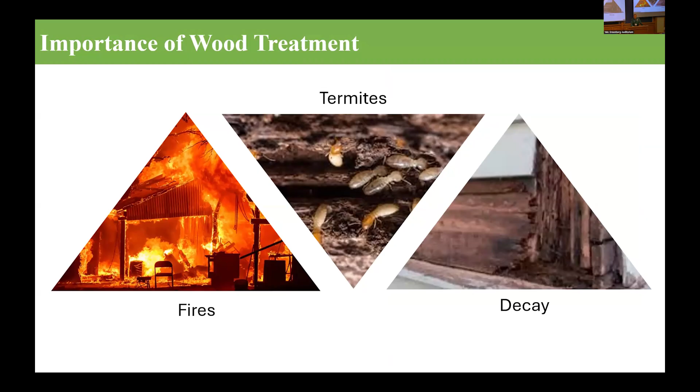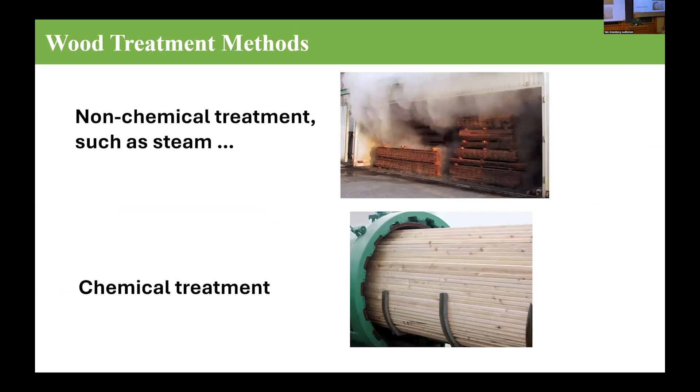Talking about wood treatment, we have fire retardant treatment, termite treatment, and decay resistant treatment, and this has become a very important issue, especially last year, when the California fire brought attention to it. If all the wood building materials had been treated, the damage would be reduced significantly. Treatment can be done in two different ways. One is non-chemical treatment, like steam, which tries to improve dimensional stability, etc. The other is chemical treatment, which we will emphasize here.

Chemical treatment with wood preservatives, the traditional treatment: alkaline, ACQ, borate, and the fire retardant treatment. Dr. Zhu mentioned quite a few chemicals used for treatment, mainly borate, borax, boric acid, ammonium sulfate and zinc borate. Next is the chemical treatment that is mainly delignification. The wood treatment industry is about a $6 billion industry. It's a huge market out there.

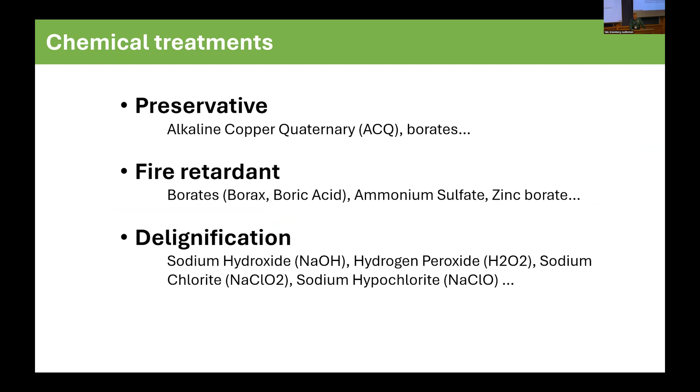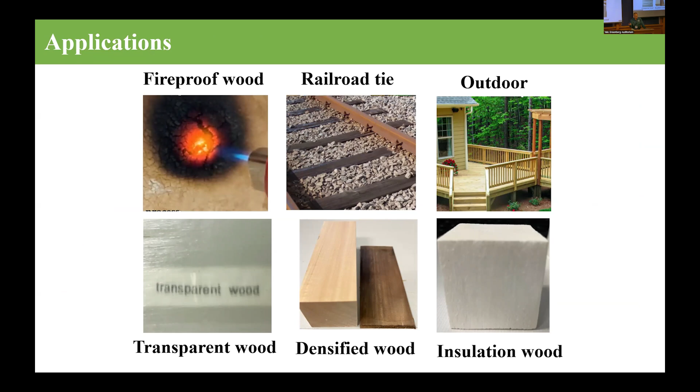I'll talk a bit more on the delignification process, because this self-flow treatment process works really well for delignification. I'll show you some of the data, and these are the chemicals typically used for delignification. There are a lot of applications for wood treatment, like fireproofing, railroad ties and outdoor wood products, which all require treatment. Transparent wood, densified wood, insulation wood have had a lot of technology developed, especially in Bing's lab, and those all require delignification.

Traditional treatment mainly relies on pressure and vacuum. There are also some simple treatment processes like immersion, and there's also sap displacement and the Boucherie process. One has pressure, one doesn't. Those are the traditional treatments. In this slide, we compare different treatment techniques and see the pros and cons of each.

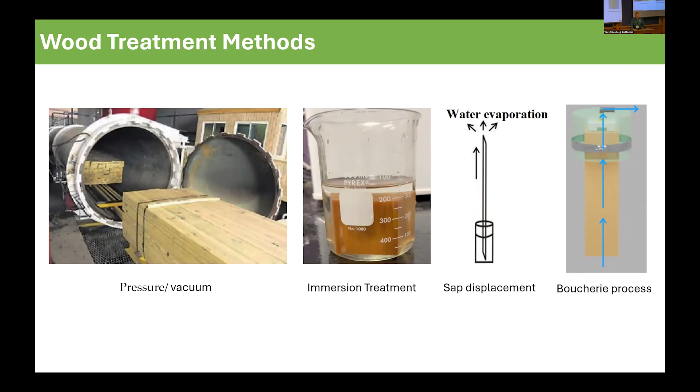The limitations of these treatments: we categorized them into two, one with pressure and one without. Without pressure, the treatment is pretty mild, but penetration is not uniform and the process is slow. With pressure, there's potential damage to the wood integrity and low efficiency. The uniformity of the treatment is the key. You can see here some damages in these pictures if you introduce pressure into the treatment.

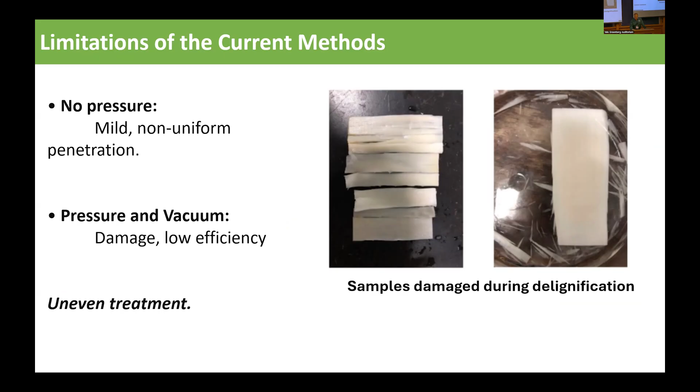Now, self-flow. This is what we're doing in this technology. It's inspired by tree growth. In a tree, photosynthesis on top draws the water from the soil up, through capillary rise and pressure differences. Following this mechanism, because wood is a porous structure, we just need to do something on the top to simulate the photosynthesis process and draw the liquid from the bottom up. Then we place the lumbers vertically in the tank.

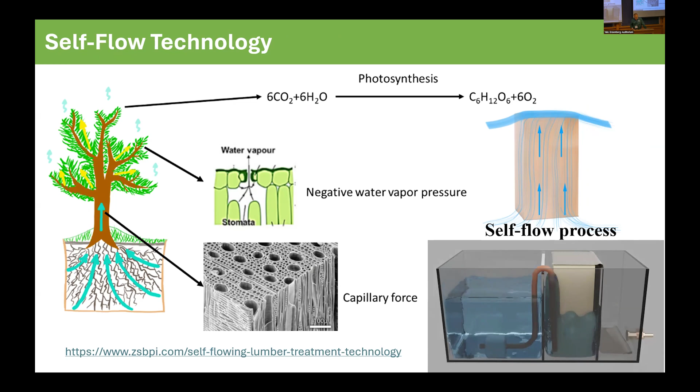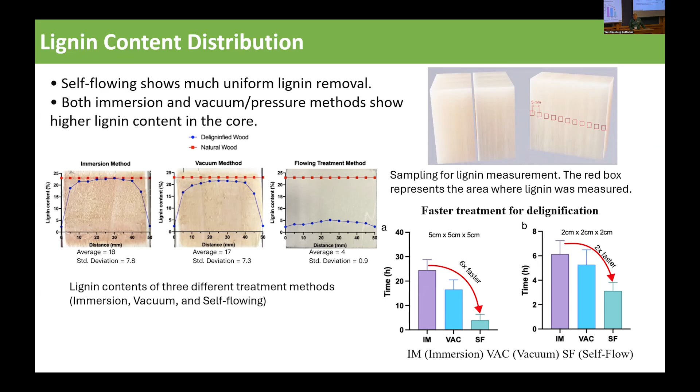And if you look at the delignification speed, it is related to the size of the samples. This is the self-flow process, this is the immersion process, and this is the vacuum. For the 2 by 2 by 2, our process's reduction is 2 times faster. But for the bigger sample, 5 by 5 by 5, these are all small, but imagine for commercialization it's a bigger specimen. The reduction rate is even higher, 6 times quicker, compared to the traditional process.

If you look at this SEM, A, B, C is the delignified wood from the self-flow treatment, and D, E, F is the immersion process. This is self-flow, this is immersion, and this is vacuum. After the self-flow treatment, there are a lot of voids opened; you can see very clearly here. But for the immersion process, there's still a lot of lignin in it, so the efficiency is a lot lower.

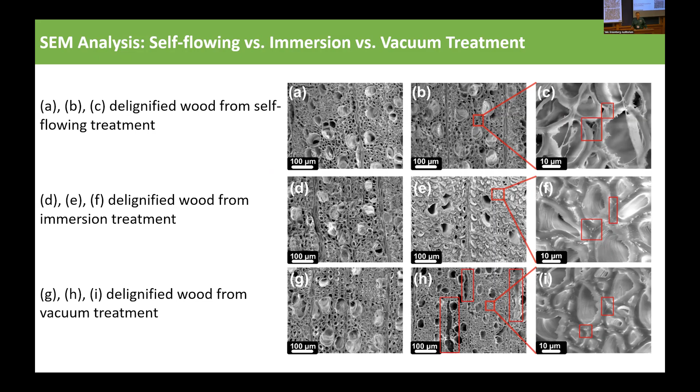And for the vacuum treatment, in addition to some of the cells still having lignin in them, you can see some cracks over here, because when you apply the vacuum and pressure, that hurts the structural integrity of the wood. So that is one of the drawbacks of the pressure treatment process.

And this is the performance of delignification for different species. We know the treatability and permeability of different species are all different, and the same happens with self-flow. For species like basswood, balsa wood, and poplar, it's very effective. We compare: this is self-flow, the second one is vacuum, this is sap displacement treatment, this one is the simple immersion process, and this is the Boucherie process. The Boucherie process is similar to self-flow, but with pressure.

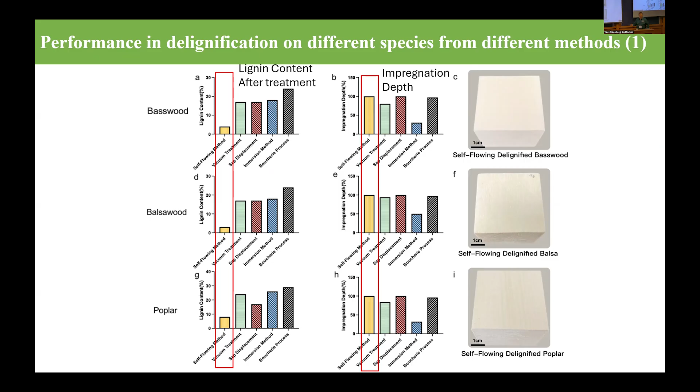And we can see the self-flow process has significantly lower lignin content. After the treatment, we measure the lignin content to check the treatment efficiency. From the different methods, the self-flow method has significantly lower lignin content for these three species. You can see the efficiency and also the impregnation depth; performance is very good for these three species.

But for pine, it's okay, still about 10% lignin in it. But eucalyptus is very difficult to treat; permeability is very low, and basically it's untreatable, even using self-flow. So there are still some limitations for self-flow, but right now we're working on developing the process using self-flow to deal with those species that are difficult to treat. So it still has some limitations too.

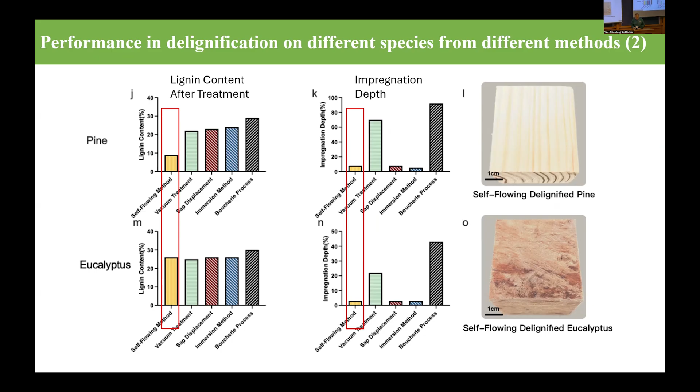Okay, and we developed a model, and this model is based on Poiseuille's law. This is the equation, Poiseuille's law, and there's a long derivation of the equations, and we end up with this model. And okay, here's the process. The two important parameters: this is the treatment.

You have to position the liquid level; it is very important. You can't get too high, you can't get too low. The liquid level cannot be higher than the wood itself, the length itself. There should be some little distance, and that distance is what we call T5. T1 is the length of the lumber, and T2 is the height of the liquid. And also another one is T3.

This is the height of the liquid in the collection tank, and the distance between T3 and T2 is what we call T4. That distance is very important. Then we're checking the effect of T4 and T1. T1 is the length of the lumber, and T4 is to demonstrate how you control the setup during the treatment.

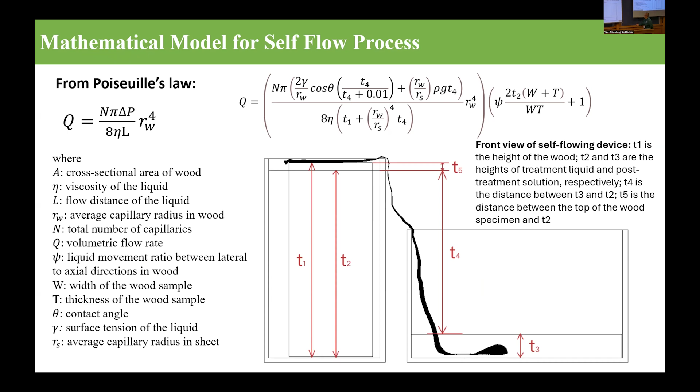That's T4. The greater the T4, the greater the flow rate, and the lower the treatment time. So T4 is controlling the treatment time. Here's the lumber height. Of course, the longer the lumber, the longer the treatment time, and the flow rate is also slow. And this is the cross section. Cross section basically doesn't matter; it just affects initially, but after a certain time, it levels off.

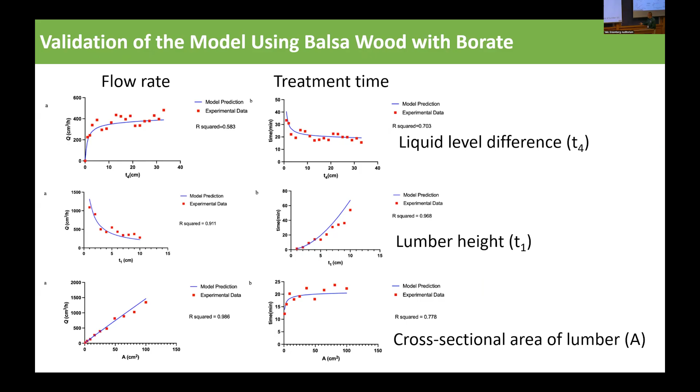So I'm going to just go to the summary table. This is the comparison of different treatment methods. For external pressure applied: with self-flow, no external pressure. Immersion, no external pressure. But the pressure treatment and the Boucherie treatment have pressure. Continuous liquid flow: self-flow, yes. Boucherie has a continuous flow, but the other three methods don't.

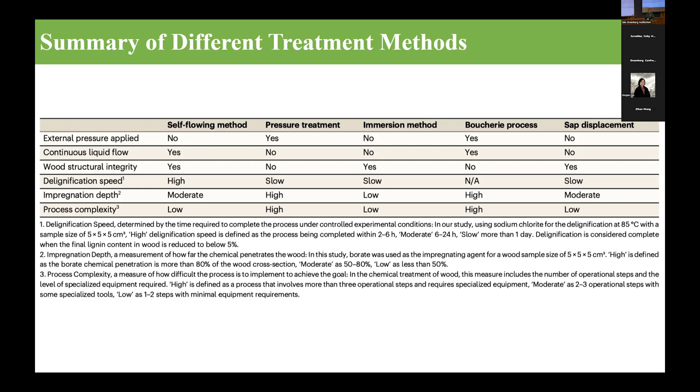Wood structure integrity: self-flow, yes; immersion, yes; and sap displacement, yes. Delignification speed: self-flow is high, the others are all slow. Impregnation here says moderate, some high, some low. We say moderate because we have to consider the different species. Some species are very effective, but for eucalyptus and those types of species, it's slow. And the process complexity for self-flow is a very simple setup. So those are the comparisons among the different treatment methods.

So this is my conclusion. Sorry, I think I'm taking a little bit more time.